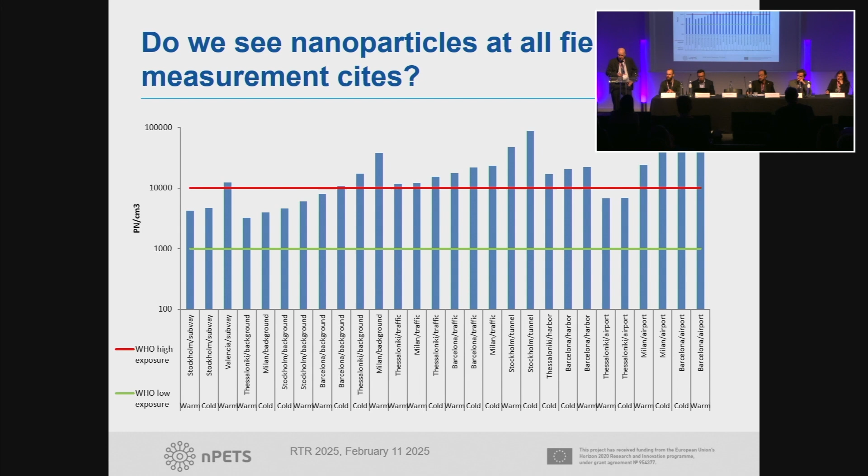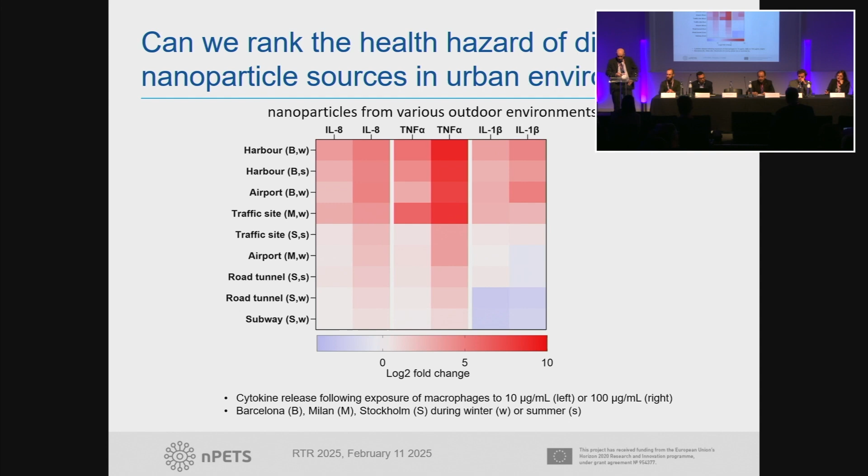The next step was to start to calculate and model. We have done models for Barcelona, Thessaloniki, Milan, Stockholm, and also Leeds. I will exemplify with Stockholm because that is where we have the longest time history of measuring nanoparticles.

So here you see Greater Stockholm area. Around 2021, we have roughly 2,100 particles per cubic centimeter on yearly average. And that costs around 500 million euro if we take it into health costs.

And these health costs are produced 90% by exhaust emissions from the road sector, actually. That is the blue part of the pie chart. We can see the yellow part, that is the harbor effect. And we can see a small fling, that's the airport effect, and we have a close-by airport, but that is mainly internal Swedish flights. And the small part, around 2 million euro, that is the non-exhaust part from road transport, actually, if we talk about nanoparticles.

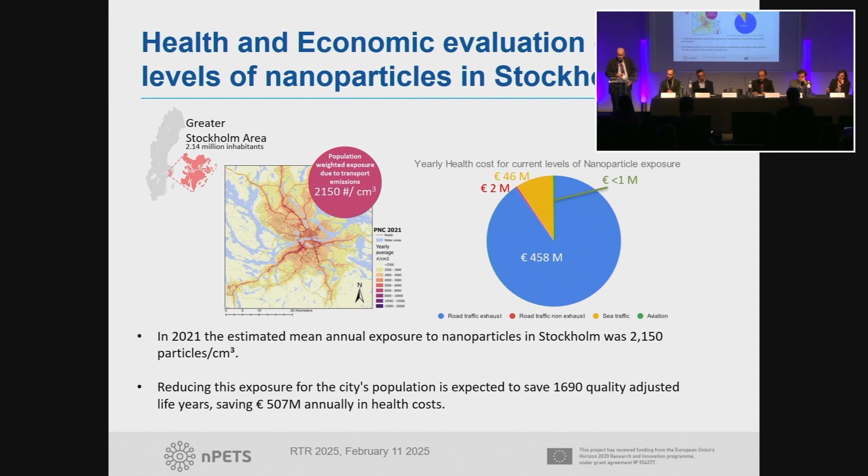So what can we do about this? Here is one example. If we just follow the anticipated fleet renewal in Sweden and apply that to the city of Stockholm, we can see that just by people keeping this pace of renewing the vehicle fleet, we will go down from, and that is based on estimation from 2021, so the situation can have changed a bit, but we will go down from roughly 2,000 particles per cubic centimeter down to around 200.

And if we estimate further onwards, around somewhere between 2040 and 2050, will the non-exhaust emission levels match the exhaust ones, given this, if we talk about nanoparticles. It's a different story about larger particles.

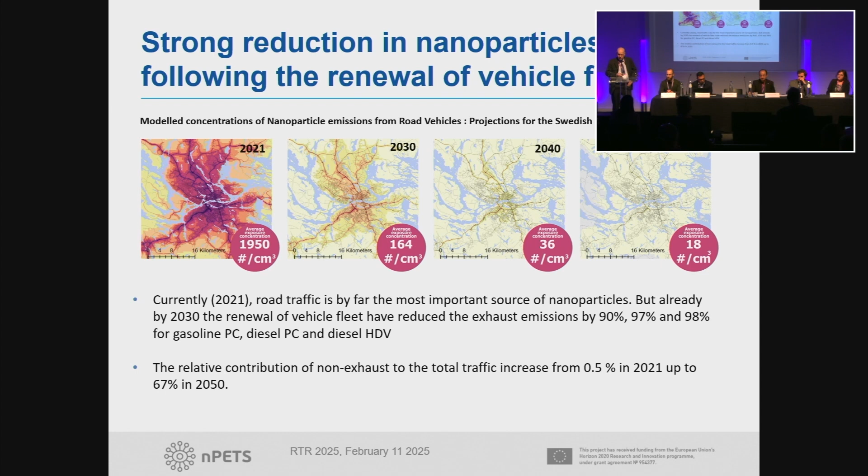We have also applied different scenarios for this, how we can reduce this further. On the top graph you see the anticipated vehicle fleet renewal rate here. So here I'm just showing the fleet renewal rate. And the second picture up there, that is an already politically decided low emission zone.

All non-electric vehicles will be prohibited from entering this zone. The third one is an extension of that zone to a larger part of the city, and finally the fourth one is a reduction of road traffic by 30%. That is already politically decided, needed to reach the goals of the municipality.

And you can see that the different scenarios bring different results in terms of cost and health. The blue bars are an estimate of the health effect, and the red bars are an estimate of the health cost. So we have yearly lives saved.

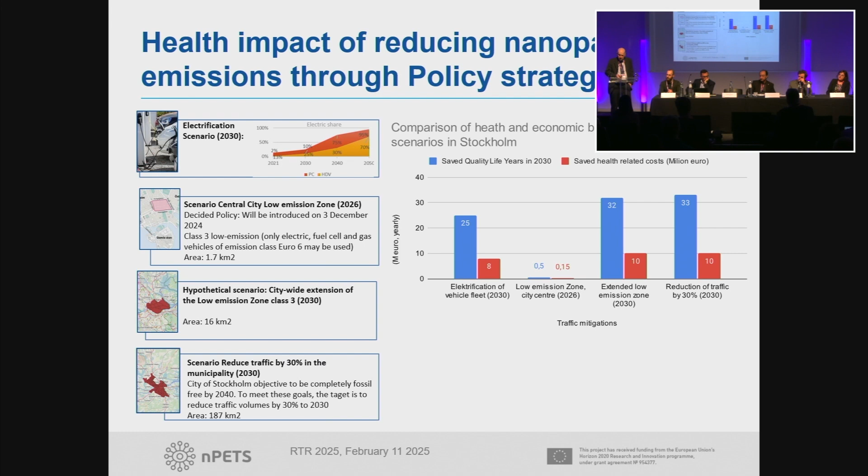So general cost-effective measures to rapidly reduce nanoparticle exposure are, of course, measuring them, but also a rapid renewal of vehicle fleets. We really need to go into electric vehicles and remove the older ones, the Euro 5 and Euro 4 that are still around, and introduce low emission zones.

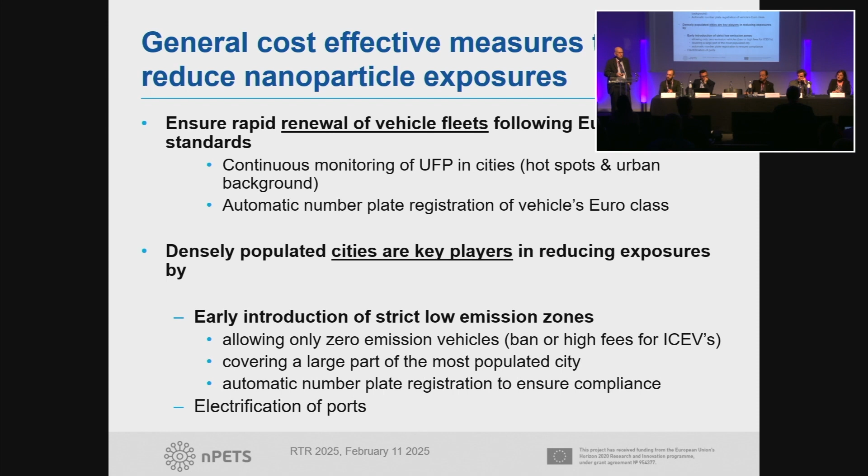We have also done laboratory testing. We checked if both non-exhaust and exhaust components produce nanoparticles, and yes, all of these produce nanoparticles. We see nanoparticles from brakes, clutches, tires, third rail, and wheel-rail contacts in different amounts.

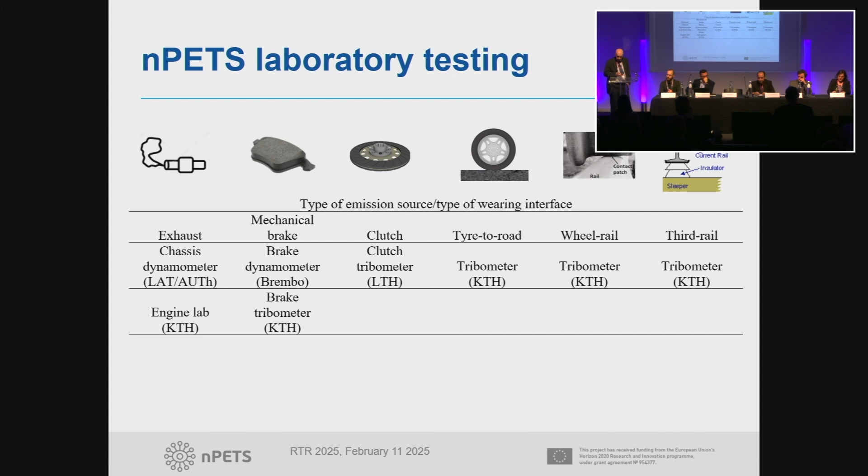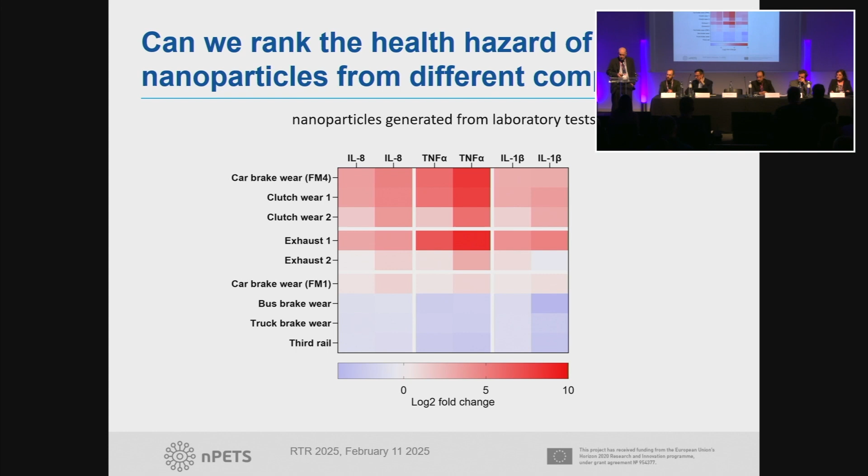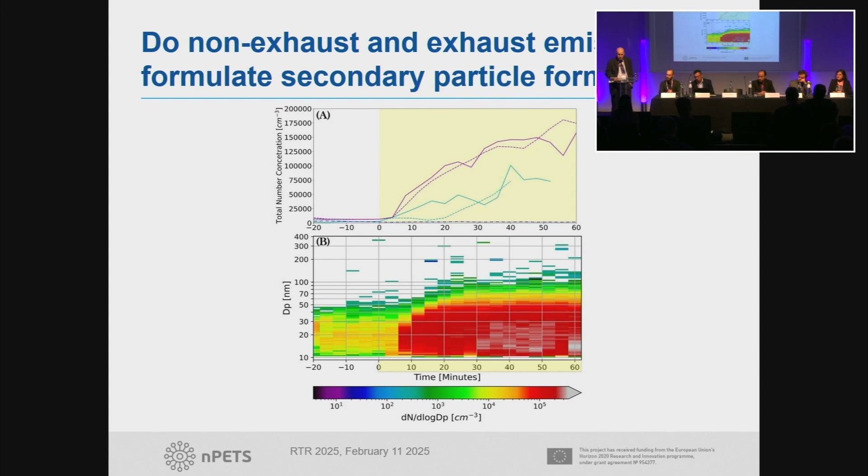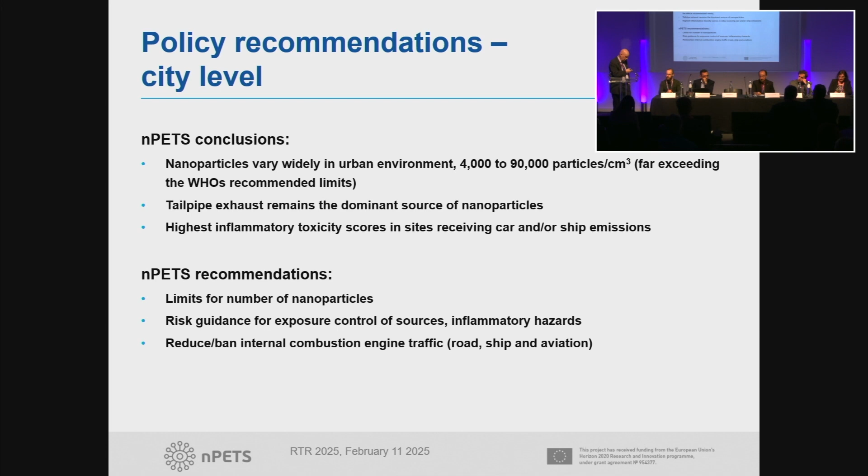So going back to this, Euro legislation has worked very well, but it's still not enough. We can still do more, actually, that can benefit at least the citizens in Europe from a health perspective.

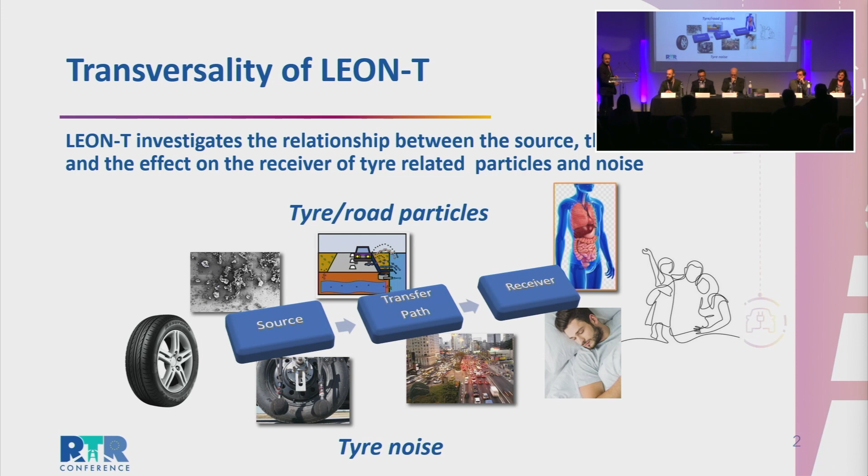And in terms of particles, again, how we measure them, how we quantify them, how they propagate into the environment, on the soil, on the air, how much these particles affect people. We have also assessed the level of inflammation they might produce on lung cells, which is an indicator of how much impact they can have on human health. So this is what we have done - an overall overview of the complexity of this source of noise and particles.

The project has been divided into several fundamental work packages that take into account this analysis. The most important, basically, is work package 2, which goes into tire wear and emissions, and work package 3, microplastics - take into account that tire particles are considered one subset of microplastics.

Work package 5, we did something very interesting in the context of the project: exploring, designing and building an airless tire. An airless tire is a tire which does not have a pneumatic part, meaning you don't have an air chamber, and the mechanical and acoustic properties of these tires change. So we wanted to see whether this could add a particular benefit in terms of noise. We designed and built an airless tire for a truck, which is the first we have seen so far, and we checked whether it offers potential for improvement.

This was the objective of one work package. Then the analysis for the impact of tire noise on sleep was done in work package 4 in particular. So we have 4 work packages focused on pure research, basically, and development.

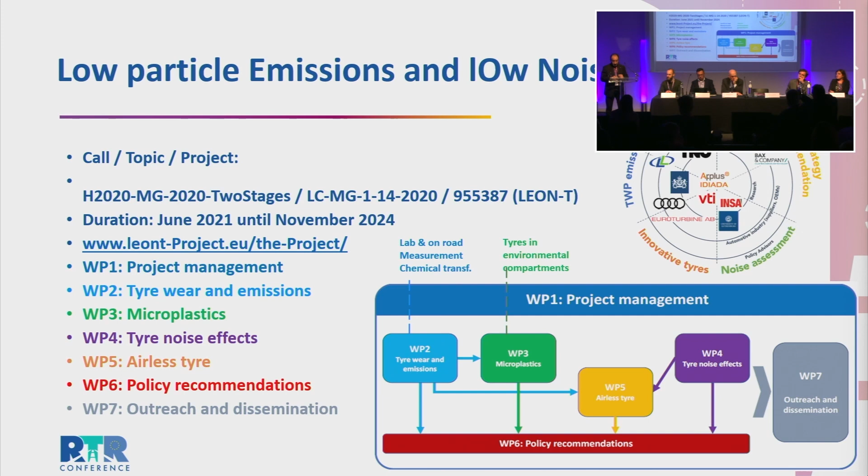So the most important point: we have a source, and this source produces particles. What is the first thing you do with a source that produces something that is bad? You quantify how bad the source is. And this is what we try to do.

It turns out that tires produce particles, but the type of particles, their shape, chemistry, composition, and the distribution of dimensions depend on the tire, the road surface, how you drive the vehicle, what type of vehicle, and how the circuit is designed in terms of lateral forces, acceleration, and braking forces. So everything affects tire particles.

So we said, let's try to measure tire particles on board in real driving conditions. We were very brave trying to do this. Basically, we took a light commercial vehicle, a van, and built a system trying to catch all these particles in real driving conditions.

Inside this cavity, we tried to suck a certain volume of air per unit time. We did simulations and assumed this volume of air would contain, on average, a certain amount of particles that we would then analyze inside the vehicle with a portable laboratory system for exhaust and particle analysis. And this is what we did.

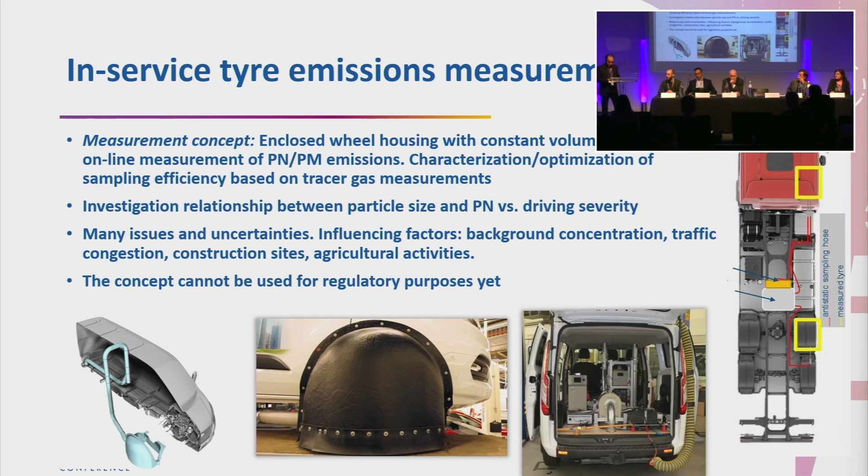So then we moved into the laboratory. This is at VTI, one of the partners, and you can see this is a very nice lab with a circular track. Here you can put four tires, like a carousel, and these tires rotate at a certain speed with a certain pressure. The room where this facility is installed becomes the cavity where I'm going to measure the particles.

We seal the room, the carousel produces tire particles, and we measure inside how the level of particles increases. So the same room is the cavity in which you do the analysis. And this is what was done, and from that we obtained the conclusions you are going to see.

Basically, this is the opposite of what you saw before. In the lab, we produce particles, trap them in the room, and analyze how they evolve. You can see important relationships fundamental to understanding the effect of tire design on tire particle generation — for example, the hardness, and the temperature.

It has been shown and confirmed that as tire temperature increases, the tire becomes softer, and the softer the tire, the more particles are generated. This is clear, this is confirmed.

Another factor is the tire itself, depending on its hardness. Summer tires tend to be harder, winter tires tend to be softer. It has been measured that winter tires, being softer, produce more particles than summer tires, which are harder. This is obvious, and this is fundamental tribology. This has been confirmed.

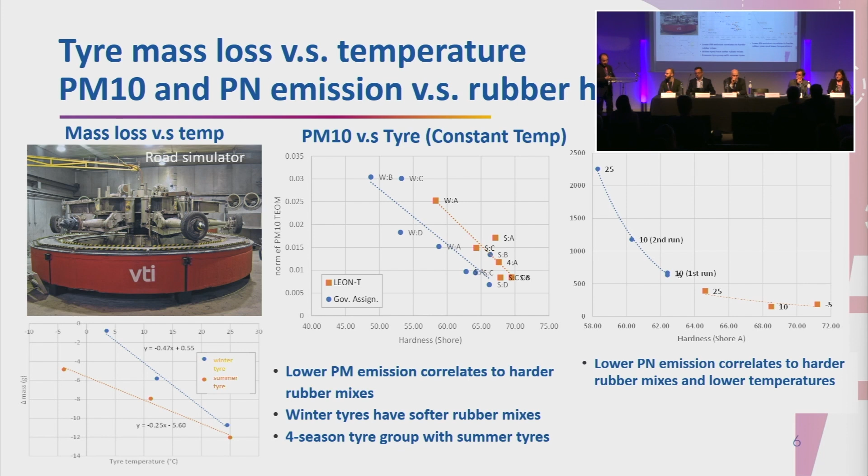What happens with road surface properties and tire wear concentration? This is fundamental, and it's like the forgotten brother. Why? Because a tire is always rolling on a surface, and this surface is probably even more important than the tire itself. At the moment we tend to think the problem is only the tire, but we are completely wrong. It's the interface of tire and road surface that really determines the problem with tire particles.

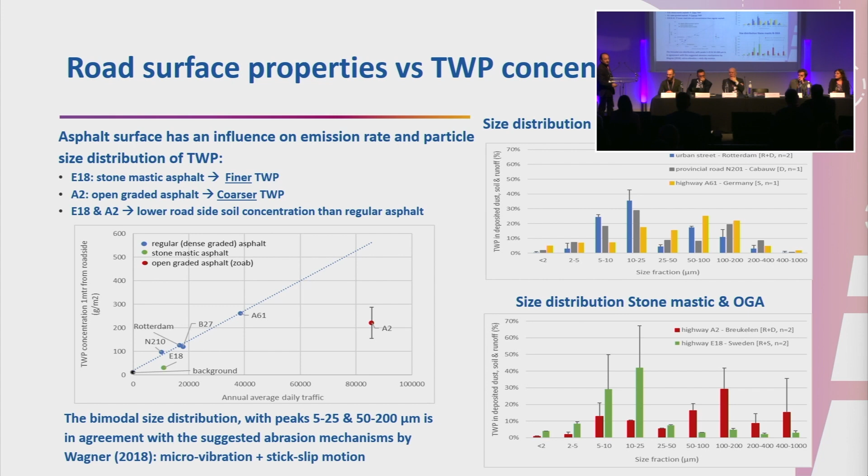What about the concentrations in ambient soil? As we move away from the road surface, the concentration in the soil decreases. In ambient air, we have measured the levels of particles in cities, in highways, and in regional backgrounds. So there are differences across environments, and also in the particle size distribution.

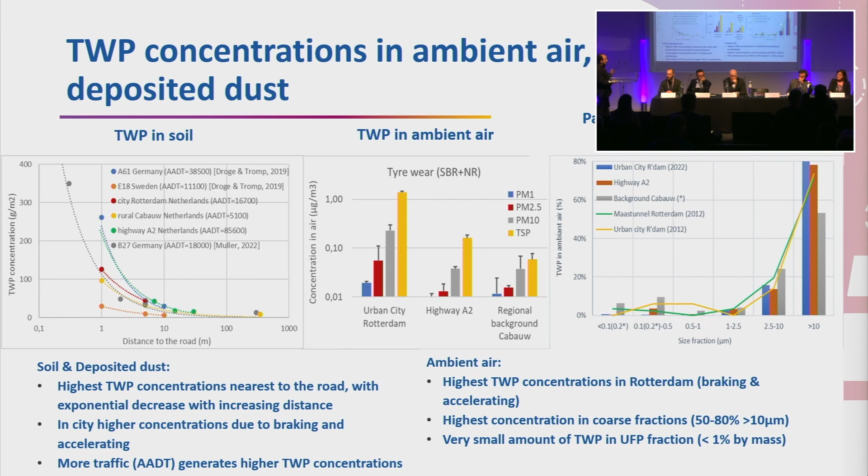You can see that in general, the sizes of the particles tend to be quite big. So, greater in general — the majority of the particles are greater than 10 micrometers.

Regarding biodegradation, in general biodegradation produces a certain reduction in the size of the particles, so they tend to become smaller as they undergo biodegradation. And from a chemical point of view, there is an aging effect — an ultraviolet aging effect — which results in removal and partial oxidation of organic additives in tire wear particles.

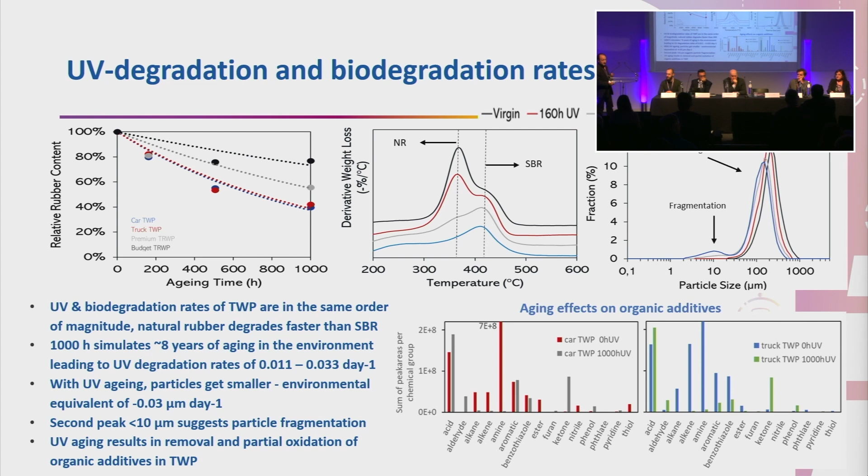On noise: what we have found is that the main issue with noise is not just the level, which has been the focus for many, many years, but the transient. What really wakes you up at night is the transient behavior of a sound you don't expect.

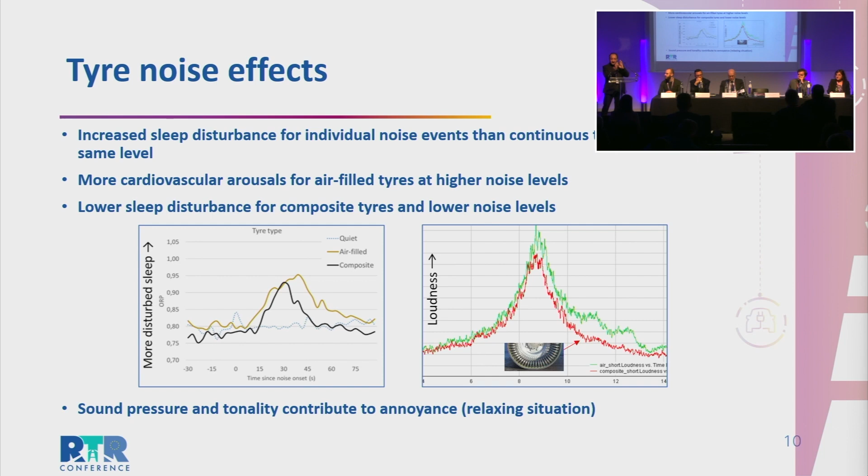Too much effort has been put in recent decades into reducing decibels, but there is still potential to reduce annoyance by playing with tonality. Tonality is another factor that can reduce annoyance and improve sleep quality by modifying tire design. This is still a niche where we can make improvements in tire noise, particularly for trucks.

Okay, tire emission factors. What we see is that tire abrasion is very much dependent on vehicle weight. So as we move into electrification, vehicles will be heavier, and we will produce more tire wear. Why? Because electrical vehicles are heavier. As we go from passenger cars to trucks, we will also increase abrasion behavior.

As you know, as you move for passenger vehicles from internal combustion to electrical vehicles, we get an increase of the order of 25% in particulate matter, PM10, based just on the impact of the additional weight from the vehicle. The same happens for trucks and light commercial vehicles. So this is an important issue: electrification makes the vehicles greener, but on the other hand makes them grayer because we produce more tire particles. So we have to play with these two trends.

Impacts and possible mitigations. Mitigations can go into reducing tire particle generation through tire design, or collecting particles, which means basically trapping them. How can we do that? Basically by using road surfaces with porosity. This works very well. We have shown that you might expect a reduction of more than 50% in the tire particles that go into the environment simply if you use porosity big enough so that the particles get trapped into the road surface, which can later be cleaned with special machines.

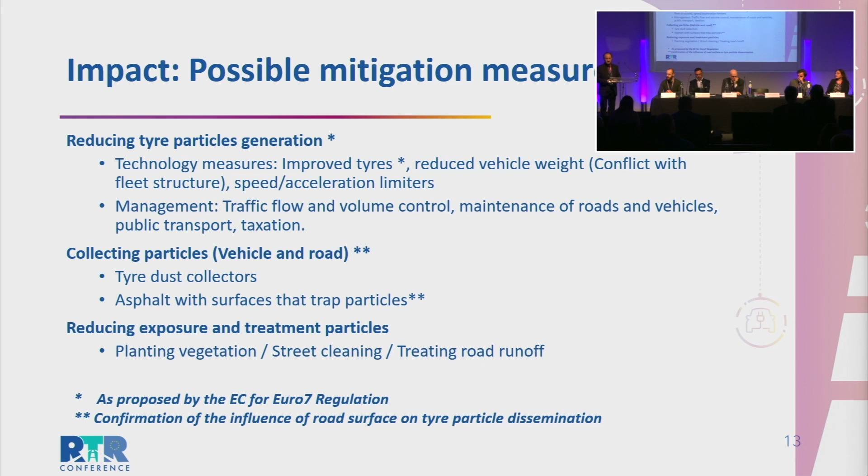So this is a very nice and attractive option. Another possibility is to collect particles, and also another possibility would be to reduce exposure and treatment of the particles by cleaning. Cleaning is probably a solution that will work, and also treating road runoff waters. This is another very powerful action that can be taken.

And this is the last part, the policy recommendations. They go from tire wear into noise. For tire wear, the cost to the environment is unknown because we still don't know the economic impact, the cost per unit of tire wear pollution. So we need to assess and explore good values of this economic impact in order to have proper cost analysis.

On-road particle matter and particle number measurements are not ready for regulatory purposes in terms of on-road tests, so they must be done in the lab, comparatively, using a reference tire. This can be done using the convoy method, but not in the way we have done it, by using only systems on the road. The results of LEON-T support the current regulated abrasion methodology with a reference tire.

Cost-benefit analysis shows a net benefit of reducing the emission factors of market tires. Another point is uncertainty in the cost estimate of the treatment facilities and in the retention efficiency for tire particles and microplastics in general, which is a point that needs to be covered.

In terms of noise, what we propose is to revise the legislation to analyze transients, maybe introduce a measurement of tonality, and recommend that tire manufacturers for trucks reconsider randomization, which is used for passenger cars, because this adds a very good value to the quality of the tire sound.

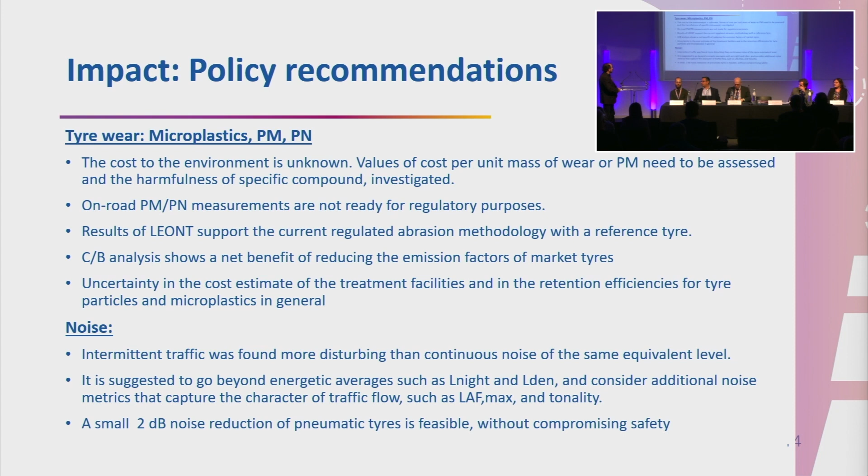Yes, we have. Sorry, the question I didn't... It's a trend, I mean, you took some conclusions at the end. Yes, I understand. For mass, what are the conclusions? Well, this is numbers?

The abrasion level that we have found, 96 milligrams per... Yeah, but that's mass. He was asking about number. Particle number, PN. Oh okay, it will be 4% of 96. No, number is the part, not mass. Ah, counts, particle counts. Oh, I understand.

Well, I don't have this on the top of my mind, but the distribution is extremely skewed. So am I, let's say, is it correct to assume that the particle number will be extremely low compared to other sources per kilometer? Yeah, I understand. Well, I cannot answer this with... Sorry, I cannot answer this on the top of my head. Sorry.

Yes, okay, thank you very much, Juan. So now I will give the floor to Mr. Spyros Pandis from the University of Patras, who will present you the results of the EASVOLEE project.

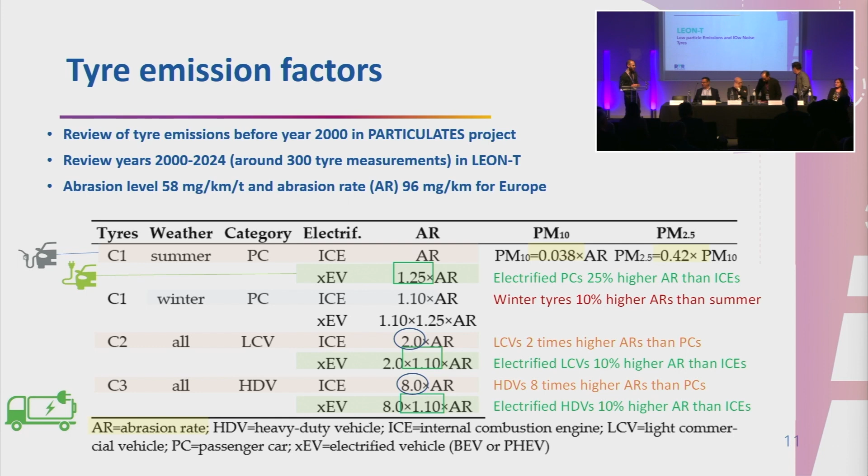Good afternoon. So EASVOLEE is trying to take a look at what happens to vehicle emissions after they get out in the atmosphere. As the emissions are getting lower and lower, what happens afterwards is becoming increasingly important, especially if you go a little further away from the major road or the hotspot.

So for a long time, the framework for looking at emissions was: they emit non-volatile particles and they emit volatile organic compounds. It became clear that these volatile organic compounds react and produce particles, and these particles are actually semi-volatile. Part of them is in the gas phase, part in the particle phase, and they evolve. So this framework has carried us for a few decades, but it became clear that it is incomplete.

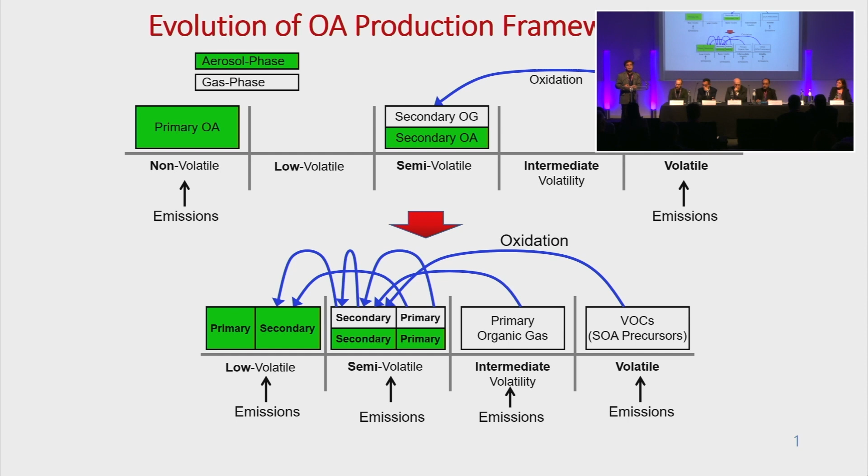Life is a lot more complicated. Combustion emissions are emitting organic compounds of all volatilities, not only the volatile ones, but things we call intermediate volatility compounds. They are a small fraction of the emissions, but very good at making secondary organic aerosol in the atmosphere. Also, the particle emissions we have been hearing about are semi-volatile - half or 3/4 of their mass can evaporate after they get out in the atmosphere. They change size, they coagulate with other particles. And to make things even more complex, all of these keep reacting, especially in the gas phase.

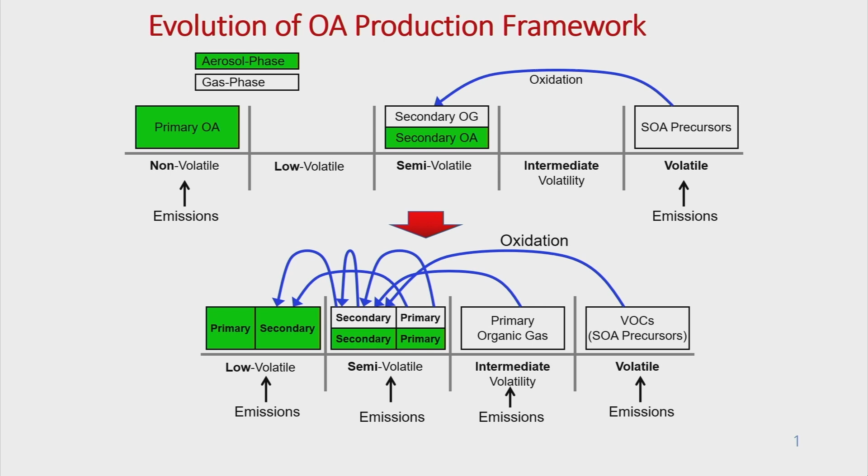So you can get material to leave the particle phase, a lot of material to come down, and this makes regulation increasingly complicated. So what EASVOLEE has been trying to do is take a look at all of these species, starting from the emissions, but going a lot deeper into what is emitted chemically and also the properties of the emissions other than mass. Then to look at the atmospheric processes, the health effects of the fresh, but also of the processed aerosol, to try to build new modeling tools that account for this complexity, and finally to use these tools to provide insights about policy and regulation.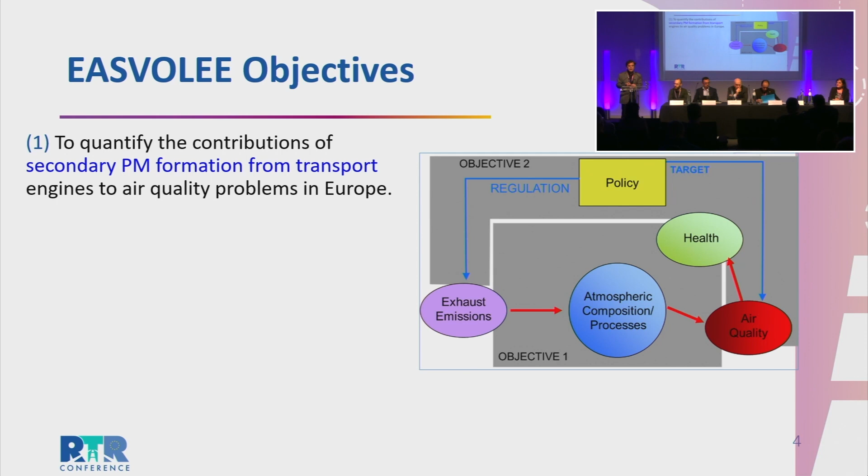So the objectives of the project are really two. First is the scientific half, to figure out the contributions of secondary particulate matter formation from transport engines in Europe. And then there is the policy part, to look at the impacts and strategies for these. We're looking at both organic and inorganic particles, at particle number, and both primary and secondary.

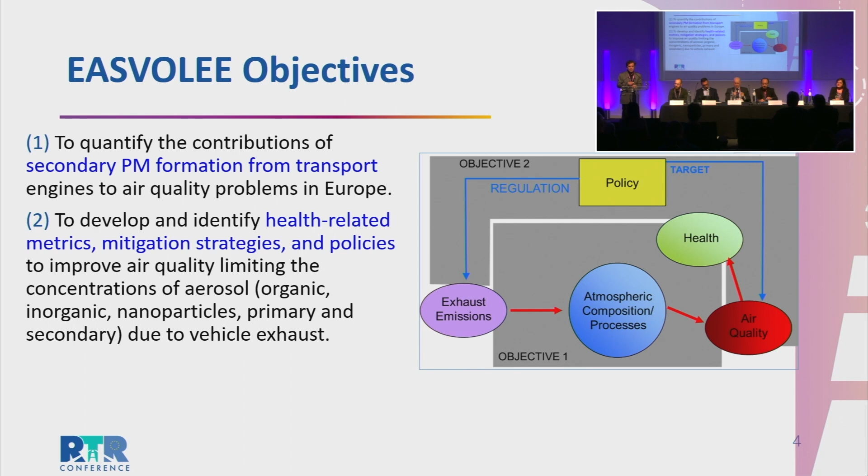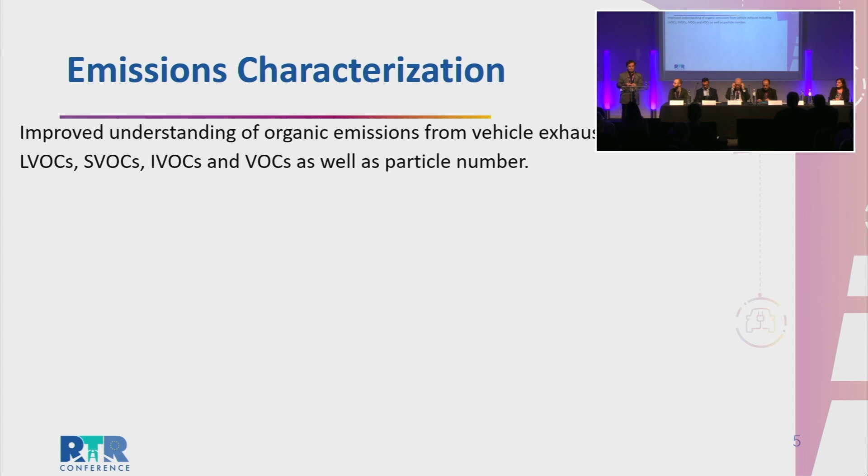So let me try to summarize a little what we have done so far and share with you some of the results. For the emissions characterization, we are looking at all groups of compounds from low volatility to volatile, as well as the particle number. We are doing kind of the traditional laboratory testing. I have chosen this picture because we are looking also at scooters, which are important, especially in Southern Europe, and sometimes are forgotten.

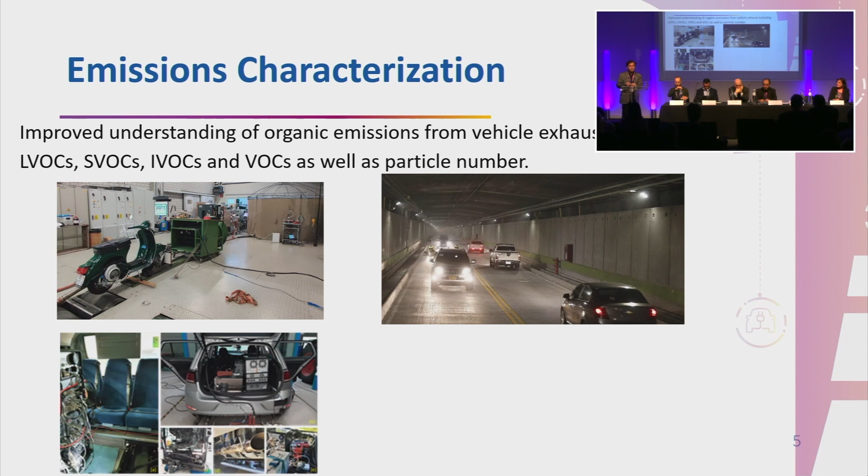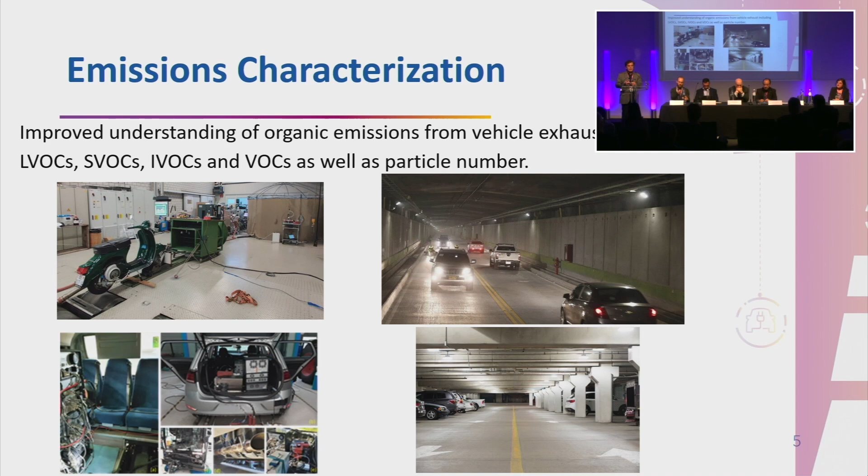We are doing real driving emissions in Lyon, both at large vehicles like a bus and smaller ones. And we had 2 kind of interesting ideas. We have done a month of measurements in the Fréjus tunnel connecting Italy and France, looking at something like 4,000 vehicles, 2,000 trucks every day for a month. And we're looking both at the emissions under these standard driving conditions and the secondary production. We have just finished a campaign in a big parking lot in Patras, looking at the cold start emissions of something like 20,000 vehicles and the secondary formation from these.

So some of the results from the measurements, these are from the tunnel. Overall, the news are relatively encouraging. Here, the different colored dots are emissions expected in different years in Europe, Asia, and the US. And here are our estimates for light-duty and heavy-duty vehicles in the tunnel. These are per kilogram of fuel. And you can see that they are at the relatively low end of what one would expect for the different years.

And these are the carbon monoxide emissions, black carbon, ammonia. Overall, there were no unpleasant surprises. It's just that we can constrain the emissions of the fleet under these driving conditions better.

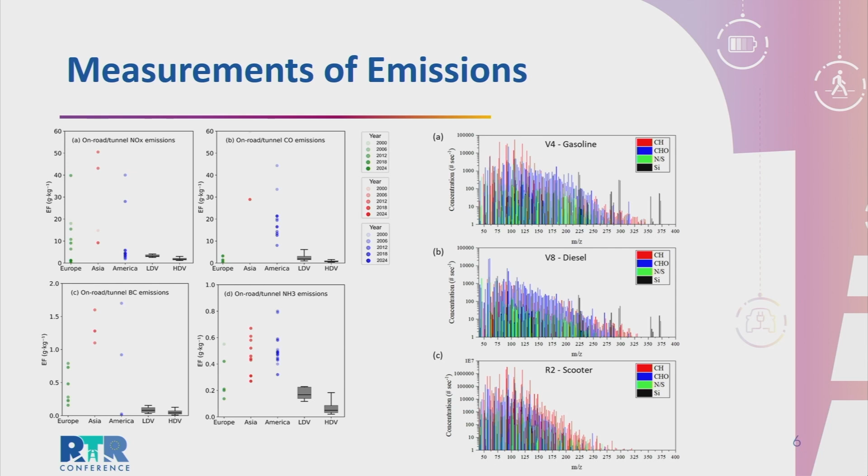Again, what is special about our measurements, and this is from the laboratory measurements, is that we get a whole lot of information about the emissions of thousands of compounds. Each line is actually a different compound from gasoline vehicles, from diesel, and from scooters. Something that may not be obvious, but if you look at the scale, the scooters are emitting 1-2 orders of magnitude more than the other cars. And these were scooters used in Switzerland, of all countries. So this is something we are following up on.

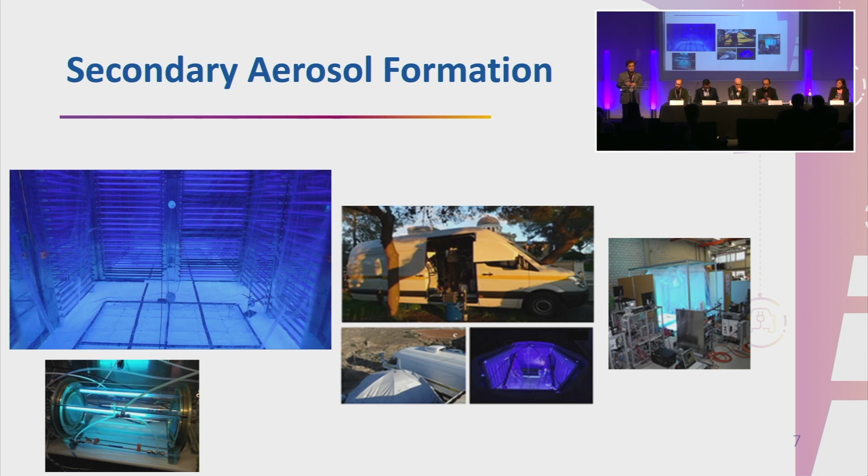Secondary organic aerosol formation. Here we are using a number of different tools. Both us and PSI have large atmospheric simulation chambers, and we are looking at specific organic compounds emitted and how much organic aerosol they form. So this is kind of the chamber. We can carry these chambers to other areas. So we have been doing measurements in Switzerland, in France, using the emissions from the atmosphere. And we are also using these oxidation flow reactors that are not as realistic, but they are very robust and easy to apply even under real driving conditions in a car or a bus.

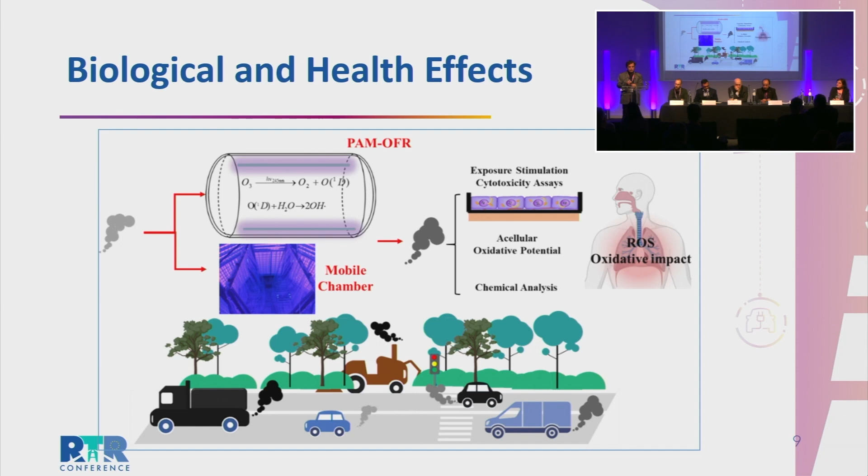So for health, we are doing two different things. We are getting the fresh and the processed emissions, and we measure both using acellular methods, the oxidative potential of these particles, but we also expose cells to these compounds to get more realistic health effects. So the results, these are from the studies exposing cells to the particles. We have been doing two different things. We have been exposing lung cells, which is what you usually do, but we have also been exposing liver cells because there are a number of health studies that show these particles can move in our body and actually reach the liver.

So this is the health of the cells with time. The black line is the baseline, and the other colored lines show how well the cells are doing when they are exposed to the oxidized particles. And you can tell they are getting worse and worse. Actually, we're finding that this chemistry makes these particles more toxic on average.

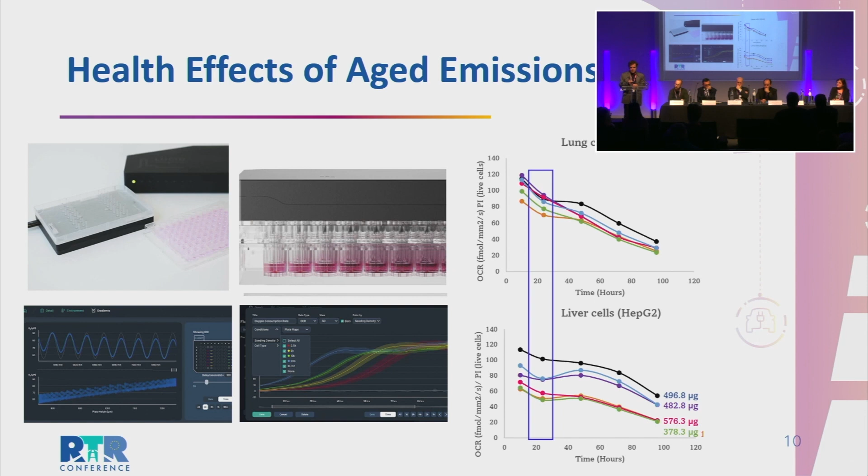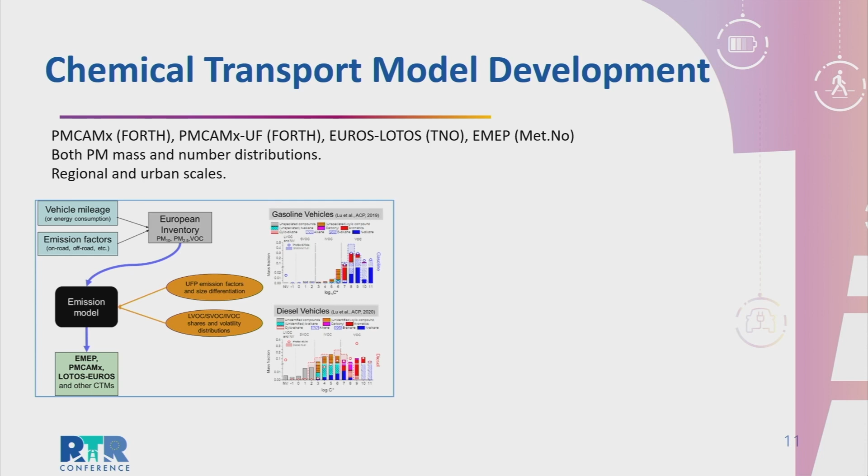The last part is the modeling. There we're doing two different things. One is that we are using three different models: the Greek model, the Dutch, and EMEP from Met Norway, which is used for policy across Europe. These models have enough complexity to simulate the chemistry that I mentioned, and we are looking at both regional and urban scales. One of the products of this work, which will be a major contribution of the project, will be a pan-European emission inventory that TNO is preparing that has volatility and chemical resolution.

It will not be just mass and number. It will integrate both the results of our project, but also of our sister project, PAREMPI, that you will hear about later, and a third project that is also in this direction. The modeling, as I mentioned, is taking place both at regional and urban scale. Obviously, if you want to look at a city, you need this type of resolution. This is what the regional scale gives. And the thing we are also doing is simulating with the same chemical complexity particle number. This is the result from the regional scale for Europe.

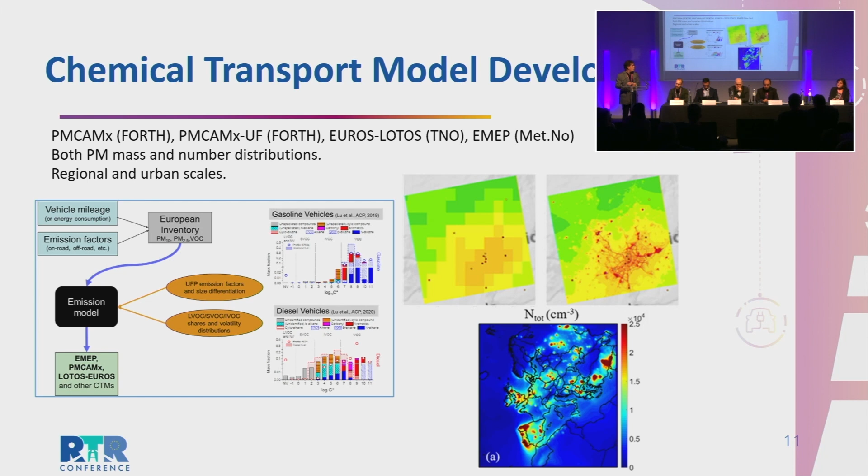So some of the results here, this is kind of the current state of the inventory for the emissions of particles in Europe from TNO. But here are kind of the extra resolution. There are semi-volatile compounds, intermediate volatility compounds from different types, from passenger cars to motorcycles. So this is not just mass, it has the volatility of the emissions included.

Also, this is our preliminary results. You know, do these things matter? And the answer is yes. This is just organic aerosol from the intermediate volatility organic compounds. This is neglected right now by most models and policy. The black line is the concentration predicted in Paris by our oldest version, and the red is with the results that we have so far by EASVOLEE, just from traffic and just for the intermediate volatility compounds. They kind of almost double the predicted concentrations.

And this is for particle number that we were discussing. These are high resolution results for Athens from different sources. This is gasoline on road, this is diesel on road, and this is actually shipping because the port of Piraeus is here. And what is important is that in this model, the primary particles evaporate, and also there are other processes like nucleation, etc.

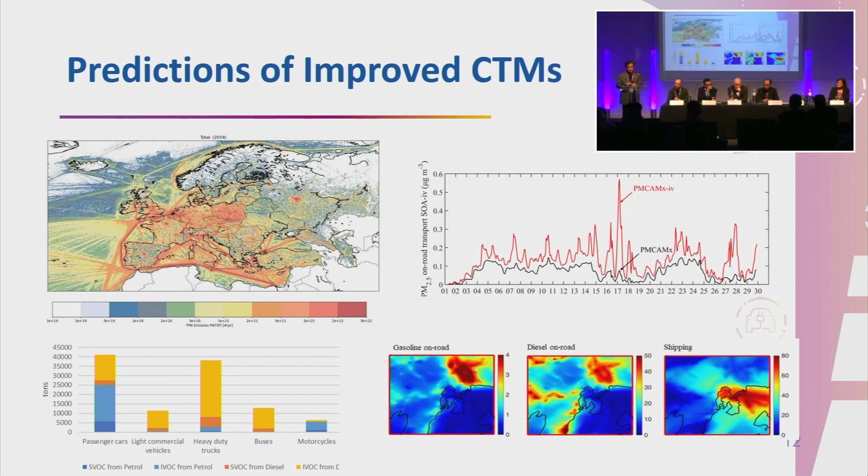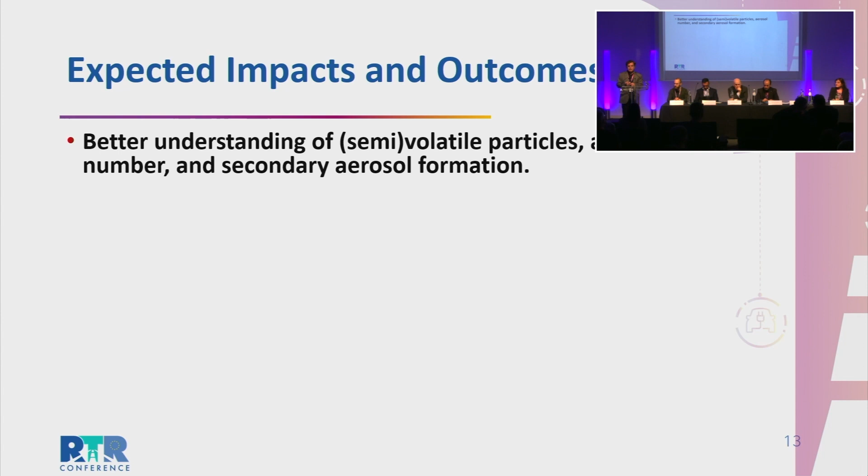So something about the expected impacts to close the presentation. We hope that first, this will lead to better scientific understanding of all of these processes. And at the same time, it will be a step forward in assessing the contribution of vehicles to mass, number, air quality, and health. We hope that this will provide additional input for policy and to mitigate secondary PM formation in Europe. Right now, all the measurements indicate that as far as particle mass, 3/4 of what we are breathing in Europe is secondary. It's not primary anymore. And this will help to quantify the transport externalities and support future legislation. Thanks for your attention.

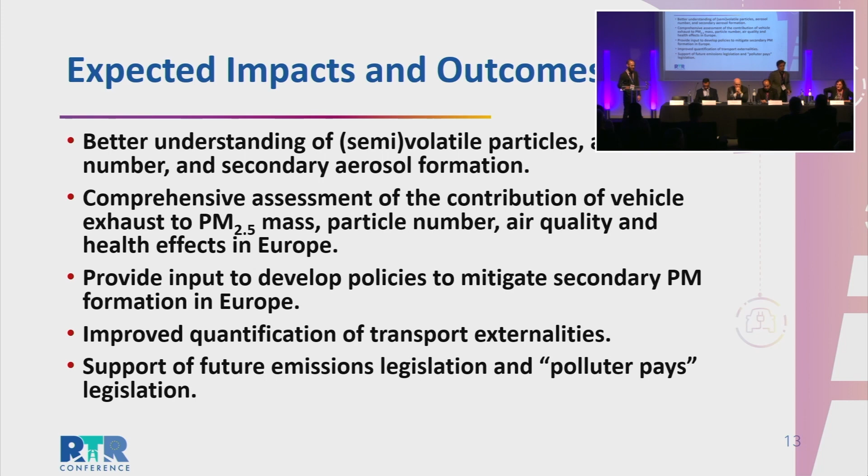Good afternoon on my behalf, and I'm going to present you sister project of EASVOLEE, and this is PAREMPI, which means in Finnish language means better. So we hope for better air quality. So the name of the project is Particle Emission Prevention and Impact from Real-World Emissions of Traffic to Secondary PM of Urban Air.

And we already heard what this is about, but to repeat, it's not the whole picture what comes from the tailpipe of a vehicle or exhaust duct of a ship or any moving vehicle using internal combustion engines. Since after that many reactions start, and all of the gases that come out from the tailpipe may go through many reactions. Nitrogen oxides can react with ammonia to form ammonium nitrates, and we have a lot of inorganic and organic components in the exhaust after 1, 2, 3, or 5 days of reactions in the atmosphere. So we want to quantify or at least understand better what is the real whole picture of the exhaust that we breathe.

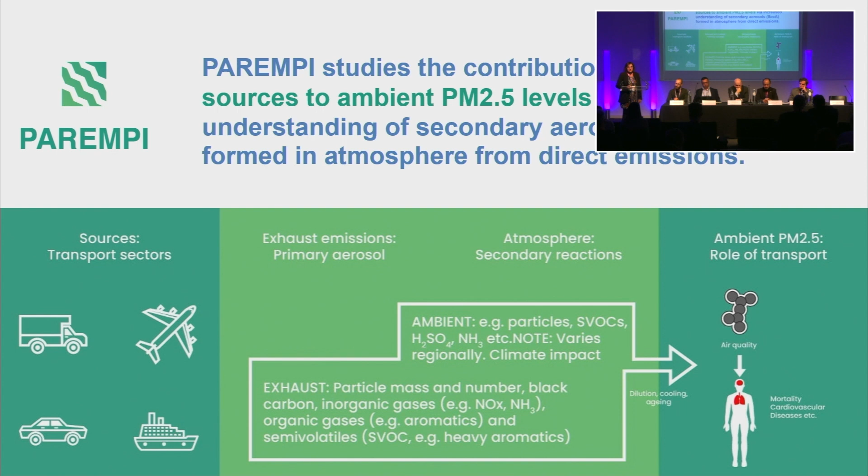Our project has been running for 2 years, and this is the last year because this is a 3 years project. We have 8 partners from 6 countries and a 3 million budget. So we have partners from Finland, Sweden, Poland, France, Czech Republic, and Portugal.

Since PAREMPI is a sister project to EASVOLEE, we are studying many subjects that are dealing with the same phenomena, but from complementary viewpoints. So we also, in PAREMPI, are looking for better understanding of the transport sector's contribution to total ambient PM 2.5. And for that purpose, we do a lot of scientific fundamental research. And we also study toxicity of the exhaust and also of the particles that represent ambient PM 2.5, since the composition affects toxicity, so not all the particles are equally toxic. So inorganic and organic particles may have quite different features.

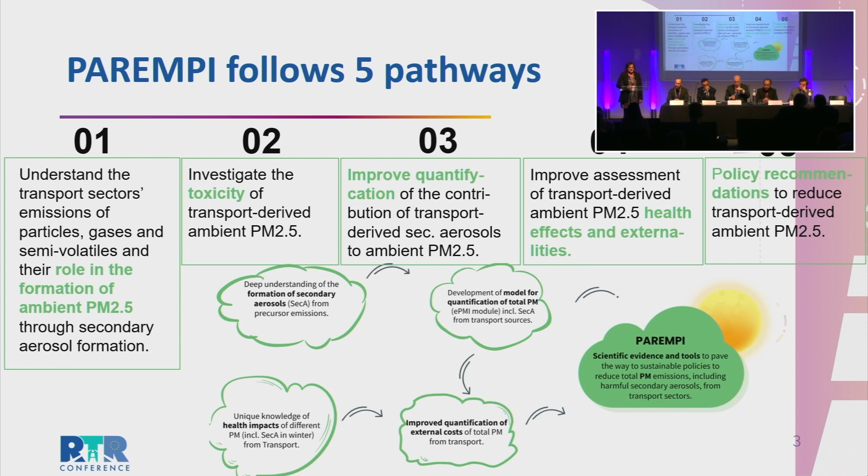And then also the health impact assessments are being carried out, especially during this last year, and the external costs will be then adjusted and improved accordingly based on the knowledge that will be generated in this project. And then we have, as the final steps, the policy recommendations and scientific report where the policy recommendations will be based on, and also the public database of the secondary organic aerosols and toxicity, and also related emissions.

So we have had complementary measurement campaigns based on the identified gaps in the knowledge, and then we have a modeling work package in the project, and toxicity health impact assessment and evaluation of externalities.

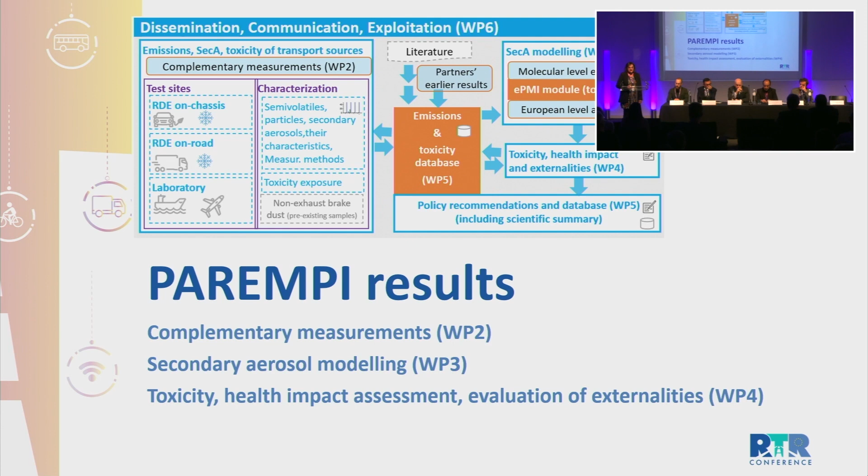The complementary measurements have been completed. We have evaluated all the transport sectors from light duty to heavy duty, aviation and marine sectors, and also brake wear measurements were carried out.

In the light duty measurements, we tested 7 cars in Poznan, Poland, representing the latest European emission standards: 2 plug-in hybrid vehicles, 1 gasoline, 1 diesel, the most recent gasoline and diesel internal combustion engine-equipped cars, one CNG car, and 2 references of older cars.

And for the trucks, we had 2 Euro 6 trucks - one was brand new and the other had 1 million kilometers driven. These were measured on road on routes reaching Lapland, with temperatures varying from -5 to +4 degrees Celsius.

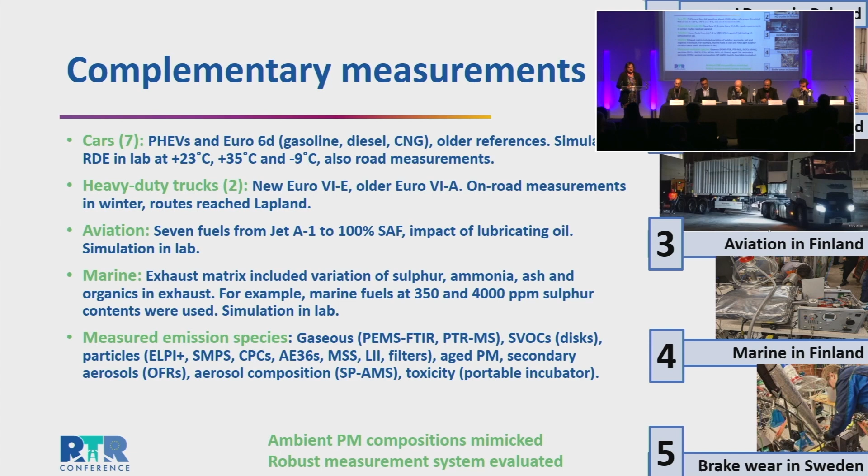The measurements covered gases, semi-volatiles, composition of aerosols and particles, and aged particle emissions after secondary reactions simulated by an oxidation flow reactor, then SP-AMS for compositional analysis. For toxicity analysis, we had an air liquid interface-based incubator system that captured the whole exhaust during the measurements.

Here are a few examples of the results being processed. All the measurements are completed, but a lot of data processing is ongoing.

As already mentioned, secondary reactions can produce a lot of particle mass, so the ratio can be 6 or 10 depending on the exhaust source. Here you can see one example of a gasoline vehicle of the latest emission standard, showing yellow rating for particle emissions, while there is almost none in the normal condition immediately after the tailpipe.

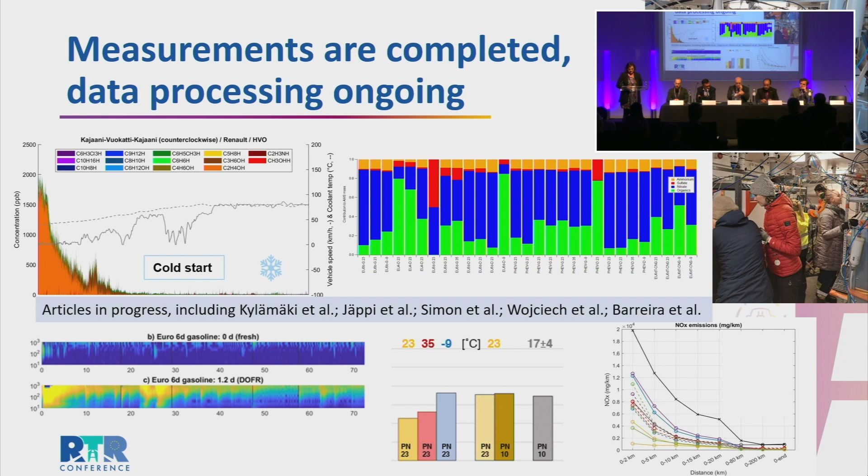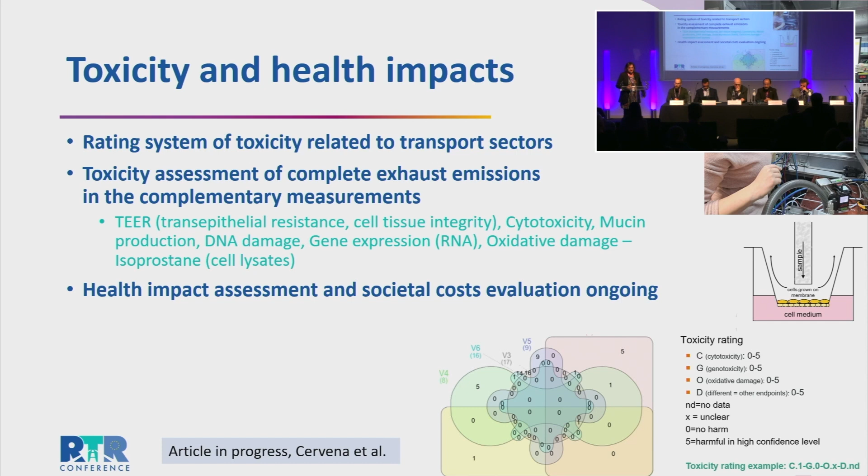Health impact assessment and societal costs are being evaluated this year. For the modeling work, it's not only modeling but also aerosol dynamics being studied - what happens during dilution and cooling.

Secondary organic aerosol formation from some representative semi-volatiles like xylenes are being studied, though there is not so much information on that yet. Modeling at the European scale and global scale will be conducted so that we know the contribution of transport in particle formation.

So there is a lot to do, and so far only a few studies have covered secondary aerosol formation and how much particle mass is generated by cars, trucks, or other transport sources, since these measurements are really complex at the moment and difficult to carry out.